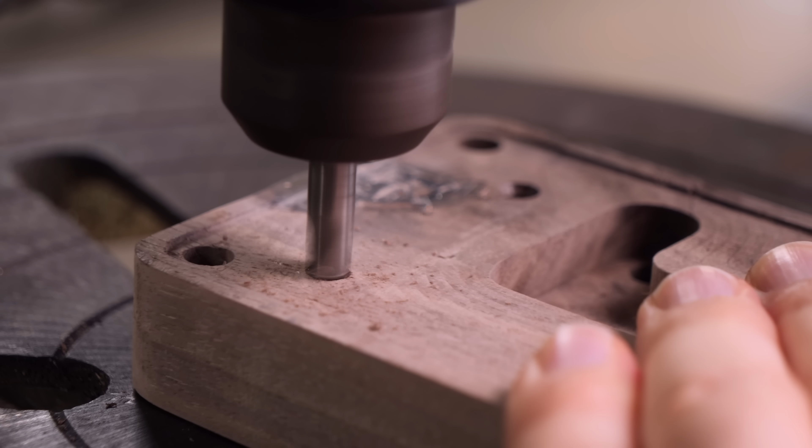I'm not sure who came up with the mini STX form factor, or how it evolved from Intel's 5x5 format, but regardless, ASRock put it on the map. When it did, this form factor was tantalizing for us small form factor modders, and many unique projects were born.

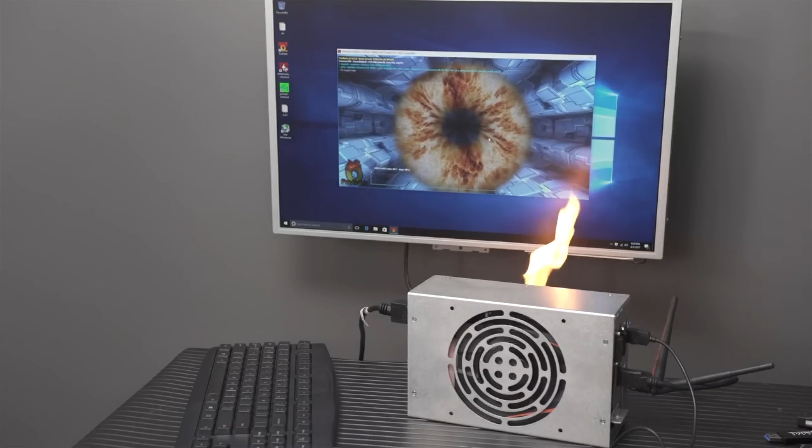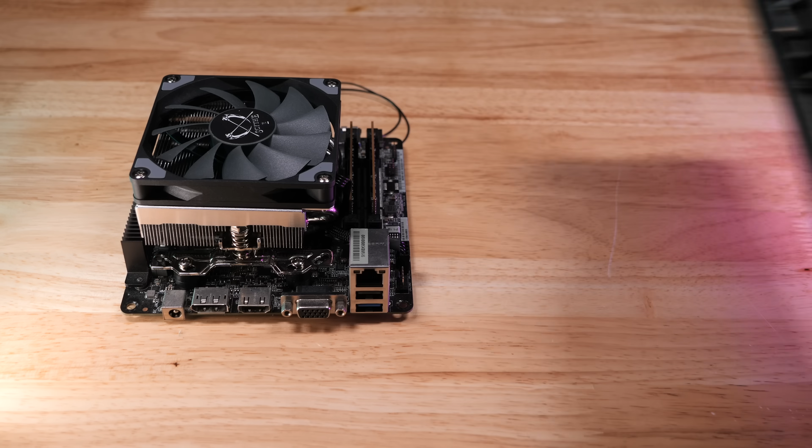Over the years, I would try to create various systems around this form factor, but there was one idea I always wanted to try but would always give up on: the piggyback idea. Please comment below with a better name, but the concept is really simple.

Take a really giant graphics card and slap a mini STX motherboard to the back of it. I wanted the design to reflect the simplicity, and looking at the finished product, it's hard to believe it took so much time, especially because it revolved around the sheet metal and not the layout. Layout is generally what takes me the longest when doing these custom builds.

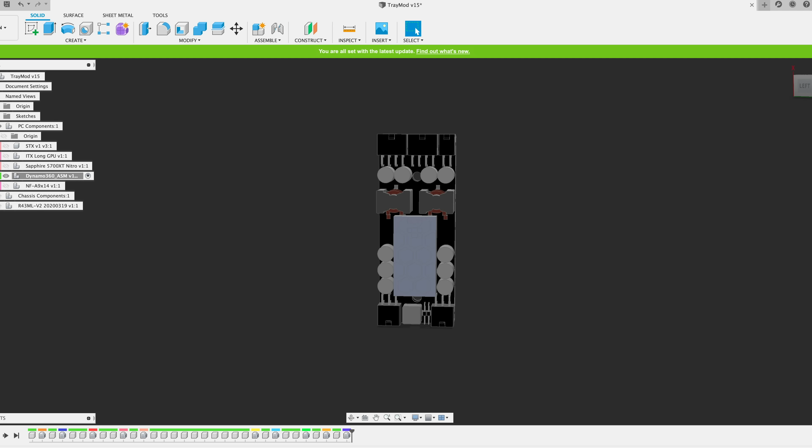NFC stands for not from concentrate, because my main goal when doing a design is to try something new and arrange hardware in a unique way. This layout was really easy this time, and I had it done in a couple of hours.

And to be honest, the couple of hours part was just deciding where I wanted my power supply to go and what I wanted my power supply to be, but I had a pretty good idea of what that was gonna look like. Figuring out that sheet metal, though, was another story.

I want as little of a case as possible to be showing. I want it to be all about the hardware, particularly the beautiful and massive Sapphire 5700 XT Nitro Plus. I finally figured the best way to showcase the GPU was to directly bolt a skeleton to the backplate.

Remember, I didn't know how I wanted the system to stand, or where or how I would make the flange or what it would look like. I tried dozens of parts before I landed on this.

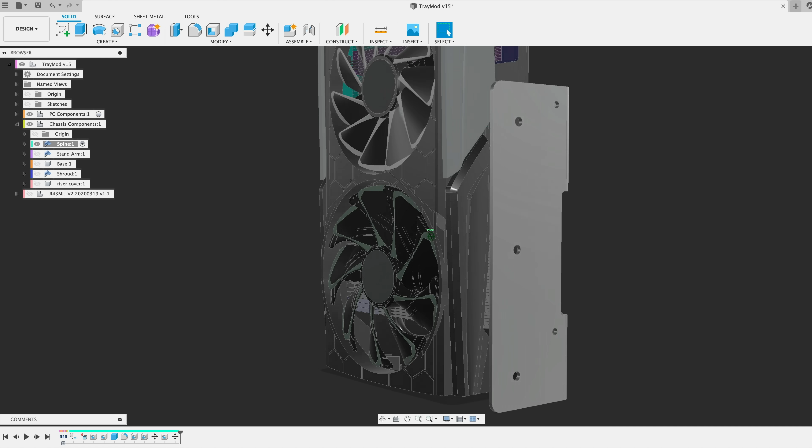The flange doubles as the mount for the PCIe riser/adapter, as well as an attachment point for the stand. The stand of the build was much easier and took far less time. The main challenge was how to make it as smooth and small as possible.

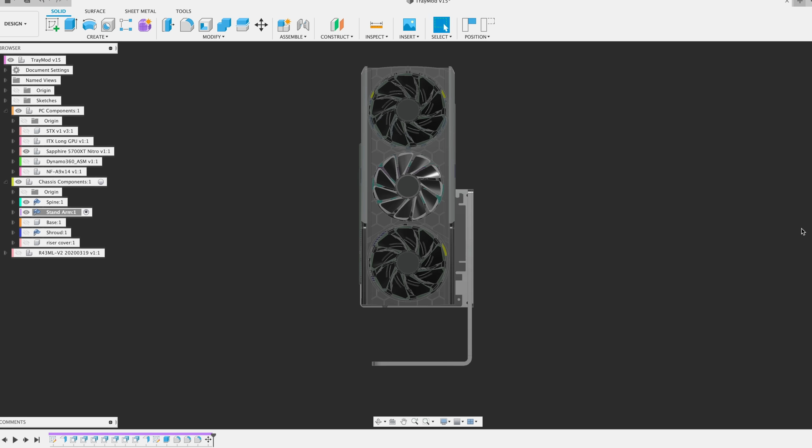Originally, I was going to have it on the inside of the skeletal flange to make it skinnier, but I realized it would look far cleaner to flush rivet it to the outside. I messed with the curves a bit and got this really nice cascade effect from one part to the next.

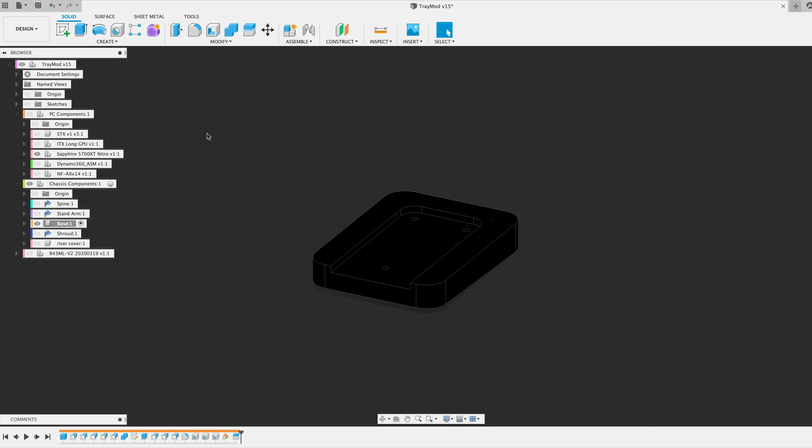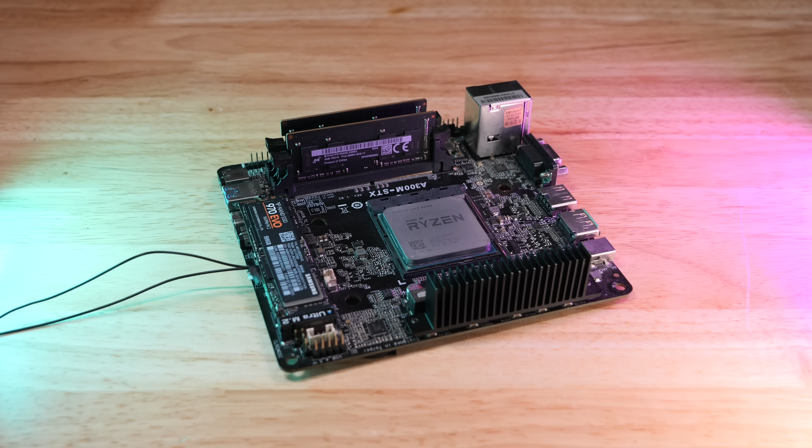With the concept in the computer and looking pretty good, it was time to prove that this system could work. Now there are some obvious challenges with this build, namely there's no 16x PCIe slot for the Sapphire Nitro Plus. Secondly, there's no pinned power header on this board, only the 19-volt DC inlet.

Maybe it's 12 to 19, but I wasn't gonna blow it up to find out. The ASRock A300 is so cool because it has two M.2 PCIe slots, so I could run an NVMe drive and use a special riser adapter from ADT.

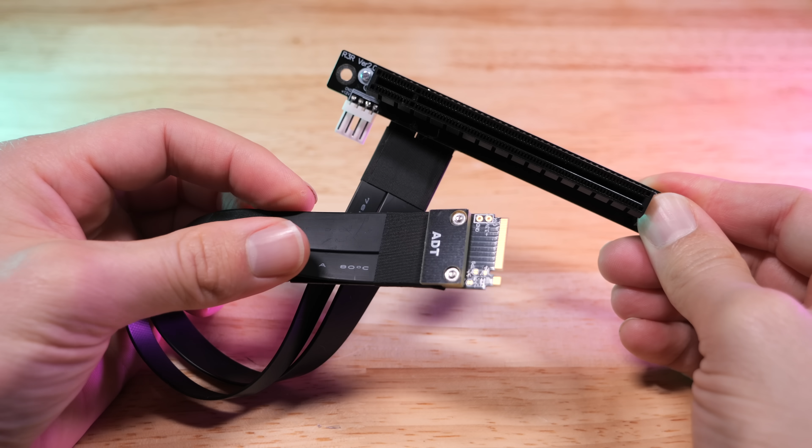They make some of these that are easy to get a hold of, but for the orientation of my board and GPU, I needed to special order something. These risers are unpowered, by the way, and that was a problem that was gonna need to be solved.

At this point, I basically had 3 devices that needed power. The recommended motherboard input is 19 volts, the riser ribbon is 12 volts, and of course the graphics card is 12 volts. I could run a separate buck booster to convert 19 volts to 12 volts, or just use 2 power bricks, but both of those are messy solutions, and I wanted something much cleaner.

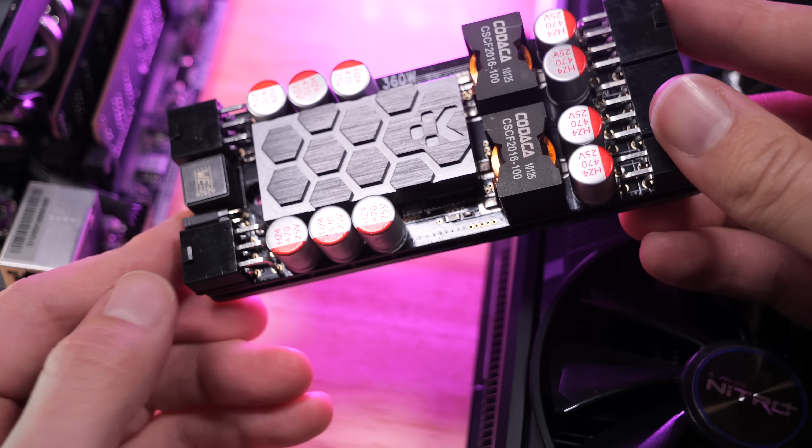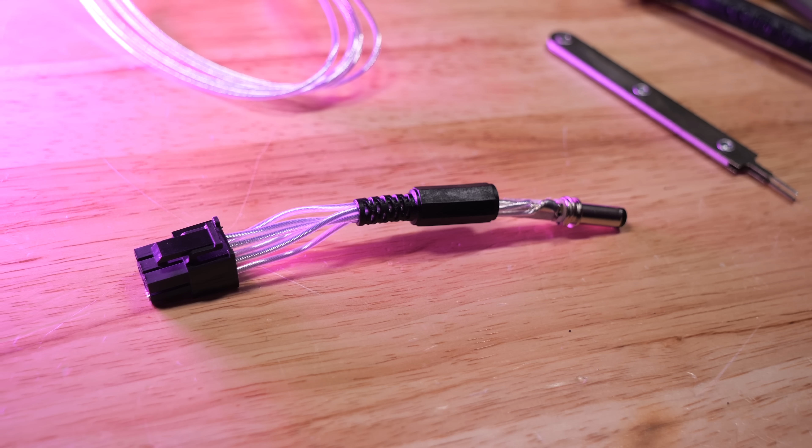This is where the Compact Dynamo 360 comes in. This is an unobtainium power supply which takes 19 volts, converts it to 12 volts, but also has a 19 volt output which can be used to daisy chain another power supply, or make a custom pigtail to plug into the back of my ASRock A300.

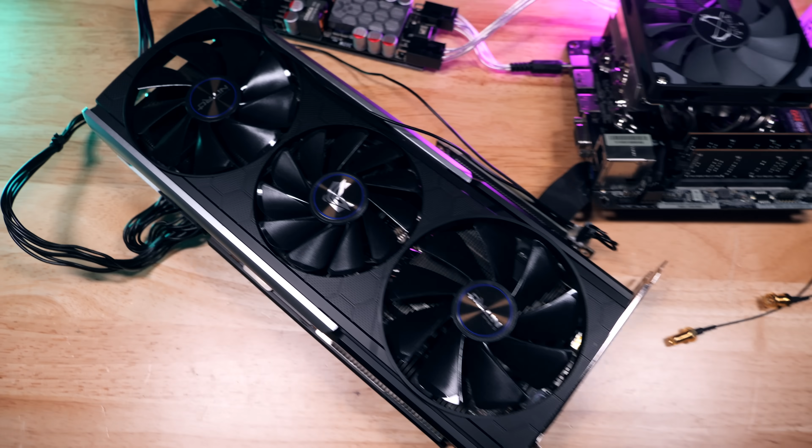Now making the pigtail was easy, but finding a high quality jack was very difficult. I found plenty that were almost the right size, but none that were quality and the right size, so I kind of had to settle. With the proof of concept working, I was free to decide on coolers.

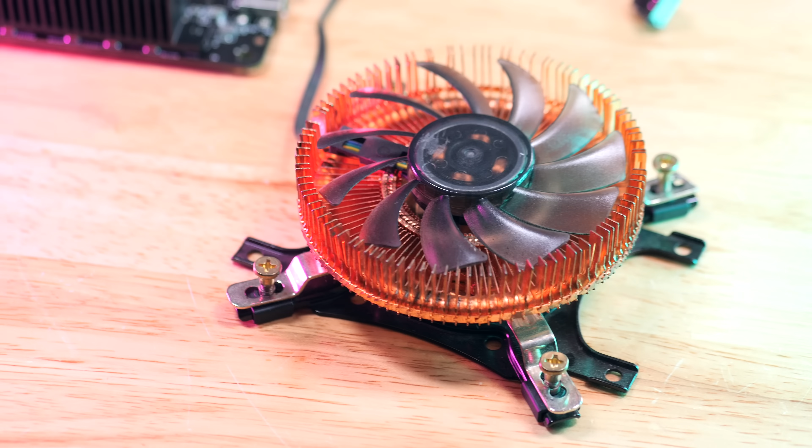I quickly realized I wanted something maximally low profile, almost 1U, and I knew exactly what I was going to use: the Zalman CNPS2x. Unfortunately, it's an older cooler and isn't compatible with the AM4 socket out of the box, but someone on my Discord, which you should check out by the way, pointed out that there is an AM4 adapter bracket kit.

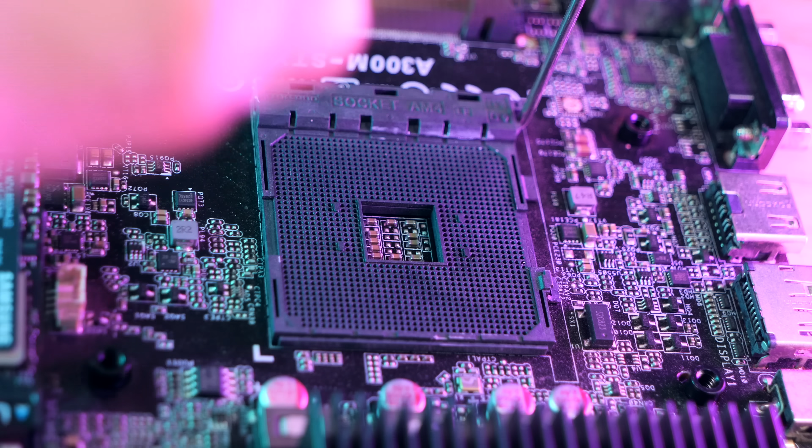But the problem with this adapter kit is that it's very poorly made, and the standoffs are not the right height to actually get any kind of contact with the cooler and your CPU spreader. So I actually had to take the standoffs and sand them down until I got a good contact. The CPU I tried first was the AMD Ryzen 7 3700X.

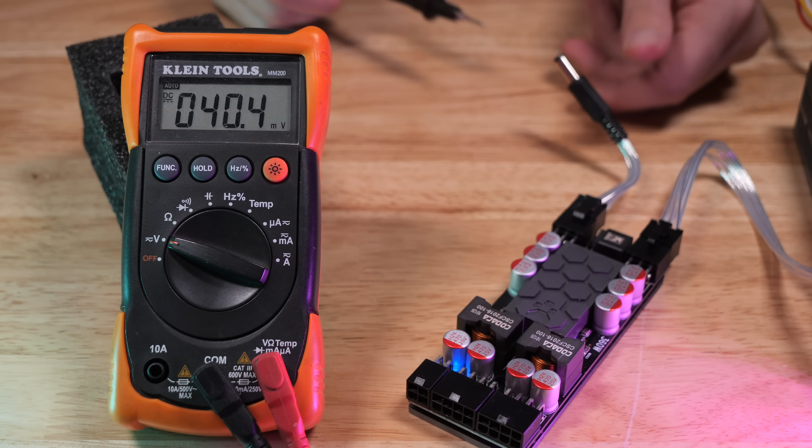Which did not work in this motherboard. There wasn't a BIOS update for it yet. Not only that, the motherboard I don't think liked the chip. That, or I did something stupid, which isn't out of the question. Either way, I had a dead, smoking motherboard and needed to find a replacement.

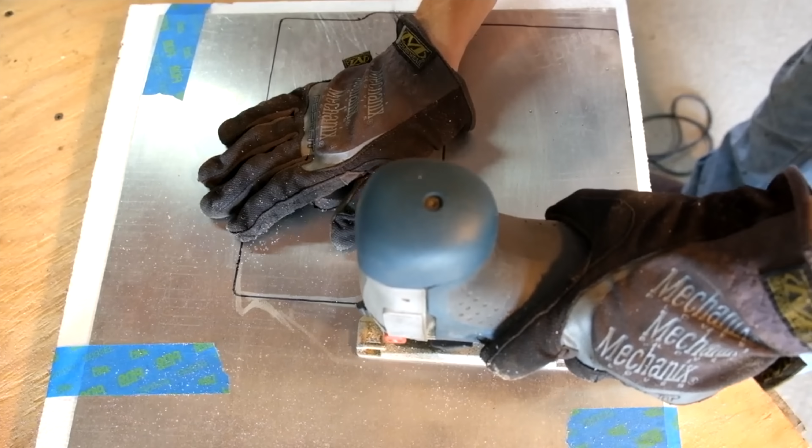But at this point they were all out of stock, so I had to go to eBay and beg for one. Now what you're watching here is an episode of a season of which there are now four that I do for Sapphire.

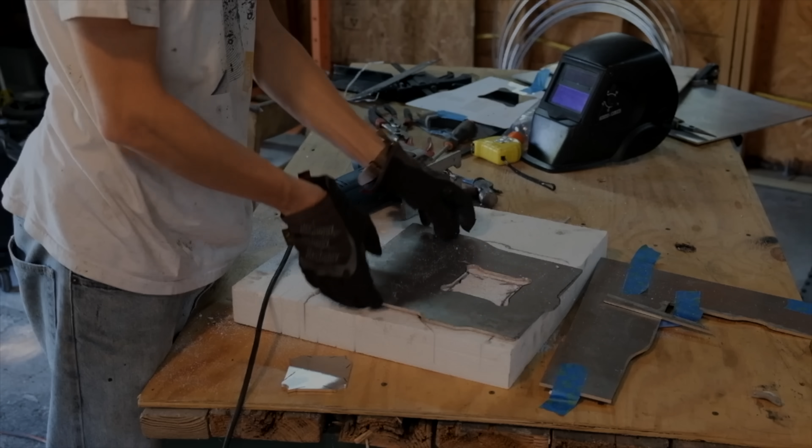And the point of all that is to say that most of the time I cut out the metal for these builds by hand, but this time I tried something different. Now I have the ability to cut metal out with my CNC laser or my CNC router, but you guys have complained an awful lot that I have too many tools or take way too long to do stuff by hand, and you want a solution that you guys can employ.

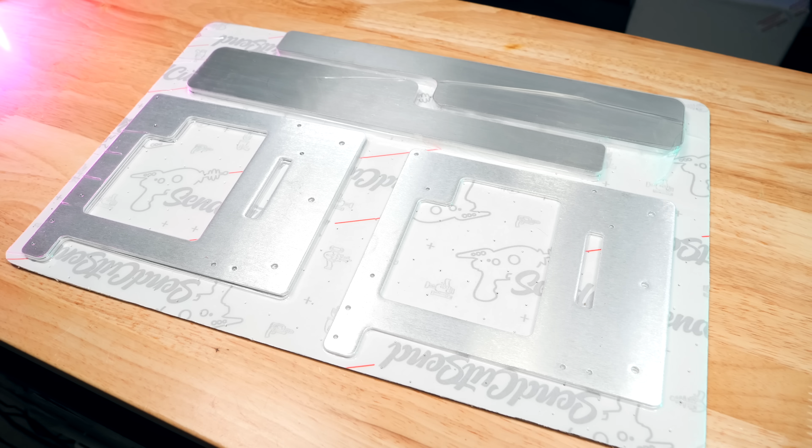So I tried out SendCutSend, which is an online service where you submit your DXF files and you get back your 2D flats, all nice cut and wrapped for you. I'm not sponsored by them yet, but I am sending them an email because I would love to work with this company. Anyway, my original plan was to polish this aluminum, so I started sanding it to prep it.

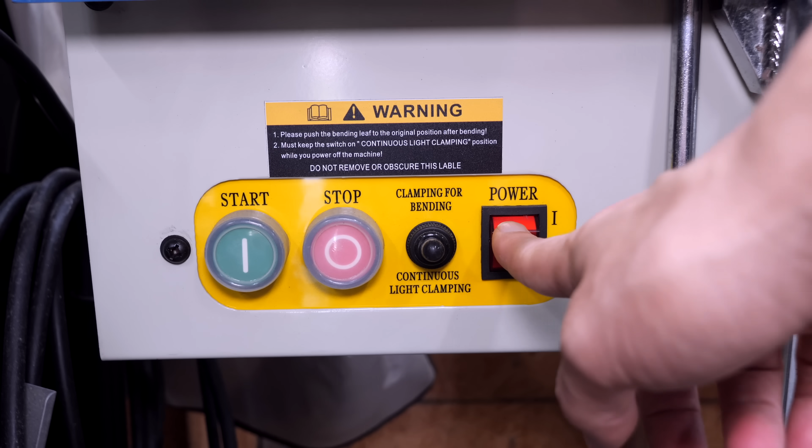But about halfway through, I decided that I actually wanted to paint it this time. My electromagnetic brake is still working for me, but these parts are so simple they could be bent on a budget DIY option. Use YouTube to get some ideas.

One thing you might wonder is how to know where to bend your metal. I use Fusion 360 to model my parts, and in sheet metal mode, I can build a part, then press a button and it unfolds flat and has marks where the bend lines are. I am oversimplifying, as there are some rules you need to input and consider, but overall it's pretty easy.

There are so few parts that after bending, I was nearly done with the frame. I knew I wanted flush rivets so the visible side of the stand was smooth. I marked my metal, set the stop on my drill press, and I had the holes with which to rivet my parts together.

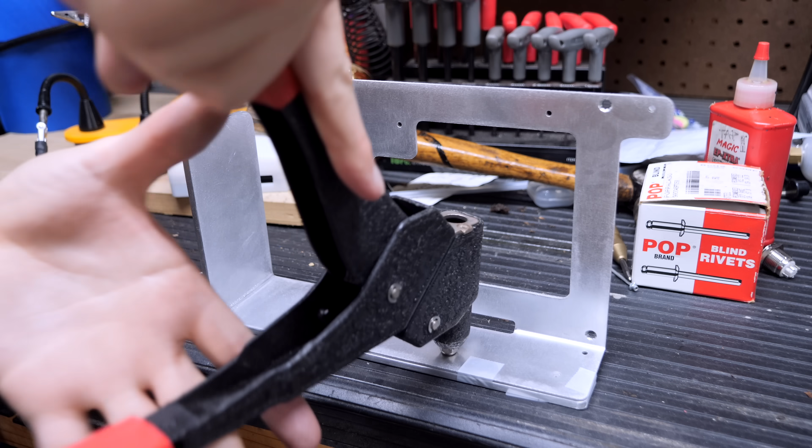The last part I crafted was the base. I went with Purple Heart because it's pretty much the motif for these Sapphire NFC videos. Now this stuff is hard, really hard. It sounds like ceramic when knocked together.

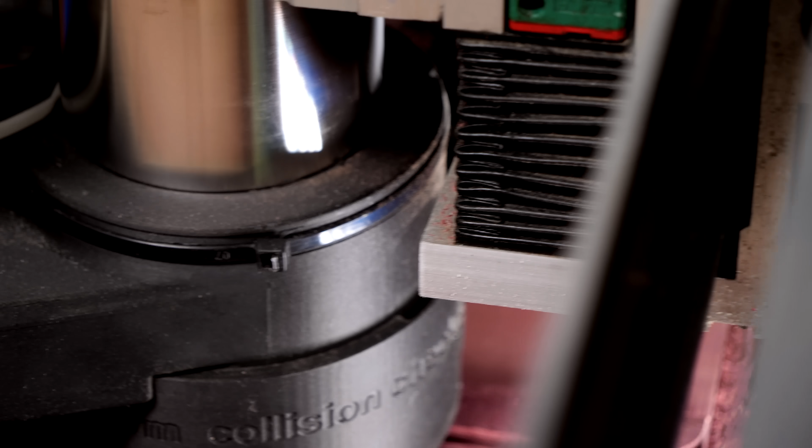I probably will have to turn that down in post. Luckily, I already know the speeds and feeds for this wood from my router, so that part was pretty easy to program, but I didn't do a good job securing the material to the bed, and I had a machine crash and broke one of my end mills.

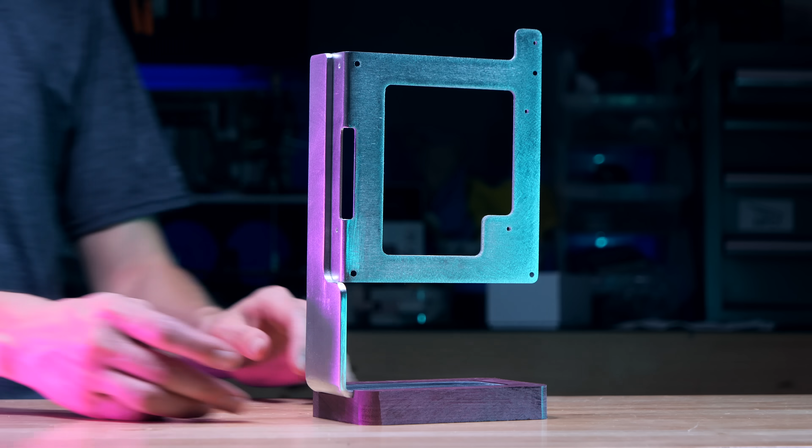I gave that piece to a friend as a souvenir, and round two produced my final part. Yeah, at least I thought it was final. You see, when I had this whole thing assembled, I found that my bend for my stand was just a slight bit off, but that offness got amplified because the build was so long, or tall, rather.

So that meant I had to go back and modify my base on the router. Now I figured out how to machine the slope on the part, but getting it fixtured was much more challenging. I had everything all set up, but when I ran the operation, my machine didn't have the clearance I thought it did, and I ended up damaging my part.

Oof. Now fixing it meant that I had to make my base much thinner than I had planned, and although it was very scary because I thought it was going to end up machining into the tool steel vise, I just barely squeaked by. Machinists out there are going to criticize me, but that's also fine because again, if you want to volunteer, I have plenty of parts that you guys could make me.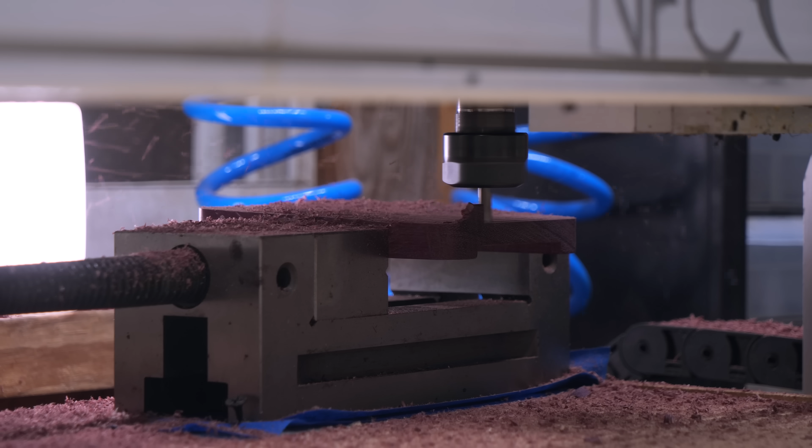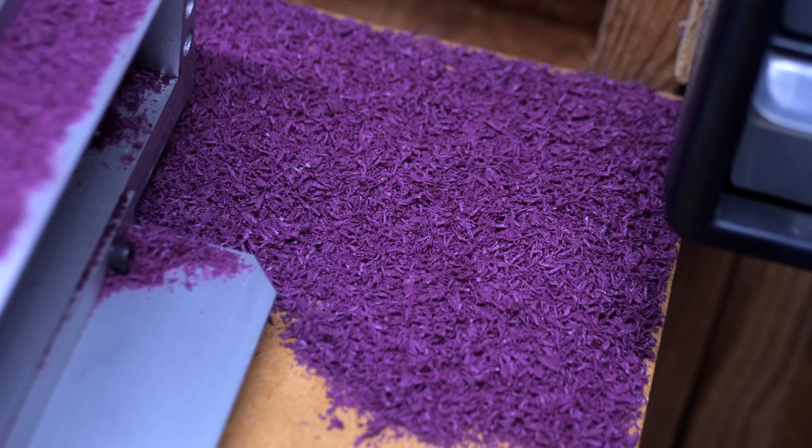Now my base is finally finished, and I want to show you all something really cool. When you first cut Purple Heart or sand it, it has a reddish brown hue, but if you leave it in the open air, it oxidizes and turns super purple. Check out the difference a day makes on the shavings alone.

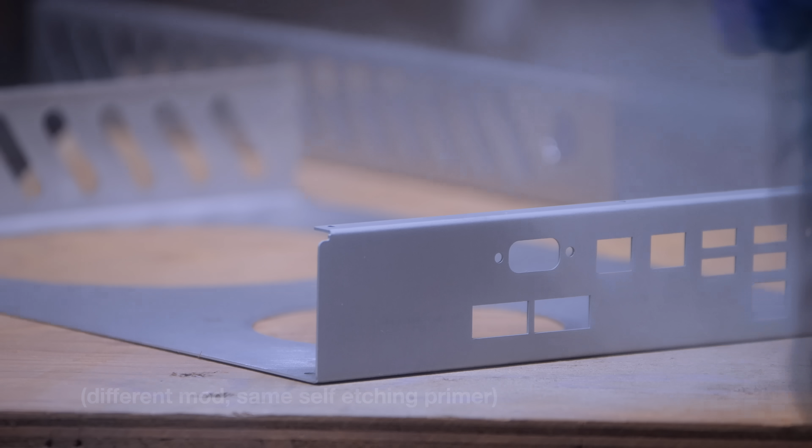The longest part of crafting was the paint process. It was the hottest and most humid time of year, and I don't have a climate-controlled shop, so I'd use tons of coats on each product because the paint was drying before it hit the metal. The products I used were a self-etching primer, direct metal primer, a metallic base coat from House of Color, and the 2K Clear from SprayMax.

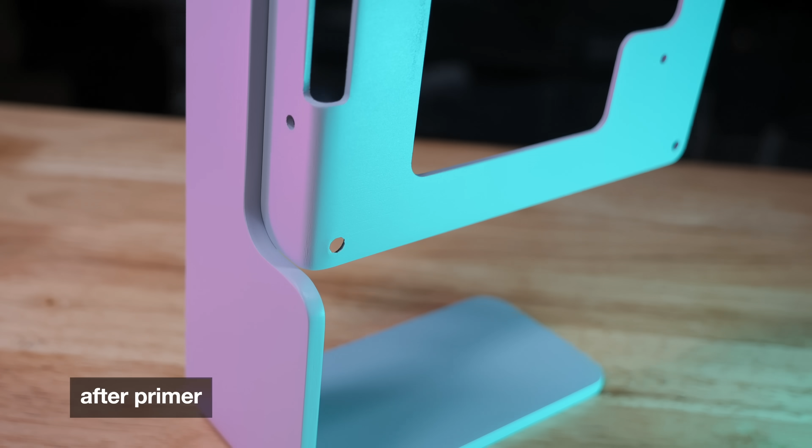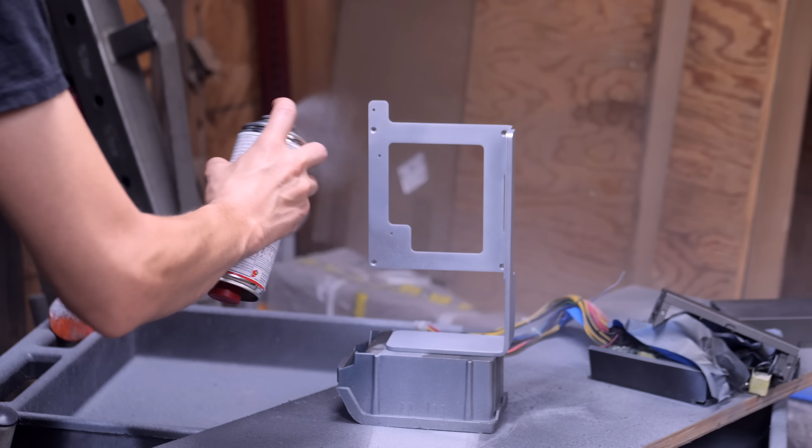I also purchased an adhesion promoter for the 3D printed parts, but decided to leave them natural because Markforged Onyx looks great as is. It took me 3 days to paint this, and in between sanding jobs I would take pictures and admire the progress, or curse the progress. I'm sure there's a pro painter watching this with lots of criticism, and that's fine.

You are totally welcome to come paint my mod next time. While I waited for the paint to dry, I worked on the PCIe slot cover, which makes this build so much neater, and also doubles as the mount for the on-off switch. This part, along with various washers and spacers, was printed out of Onyx on Compact's Markforged printer I have out on loan.

Onyx is a very strong, heat-resistant carbon fiber plus nylon mix. I ran into problems with the assembly, which was expected, but the problems were not what I expected, which also was expected.

Anyway, the fitment of the parts was spot on. The skeleton's bolt holes lined up perfectly with the GPU's backplate threads, and my custom washers and spacers made everything look very professionally engineered. Where I was noticeably not professional was that this board was not working with the 3700X anymore, and neither was my GPU.

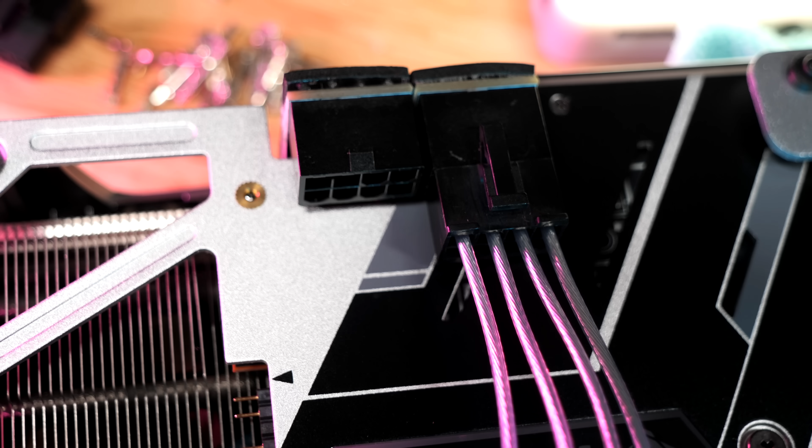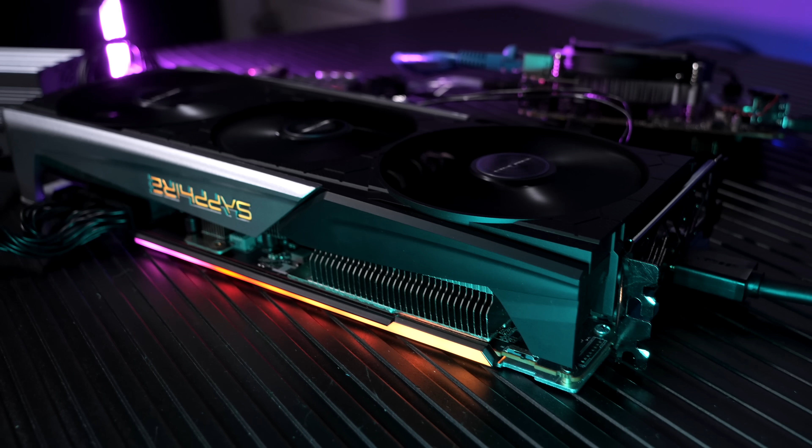These were two separate issues, but it took a couple of days of tearing my hair out working with the multimeter to diagnose my problems. The GPU problem I solved, and it had to do with my custom PCB 180-degree connectors. I think I had a bad one. Anyway, that was working now, but the CPU still wasn't.

So I decided to try a different CPU, the Ryzen 2400G. At first I was kind of disappointed because I wanted to use the 3700X for this build and not the next one, but there were two ideas that popped into my head that made it much more interesting.

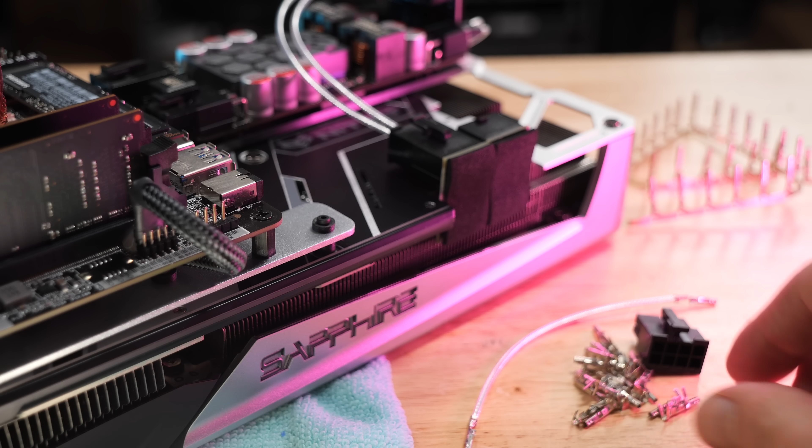Firstly, the 2400G is a natural stepping stone, I think, for some people who might want to purchase just the APU to save some money, and they can play all esport games and indie games, and even AAA games with the graphics turned down a bit. But those people might want to upgrade to a big beefy GPU at some point, and they want to know how it's going to perform.

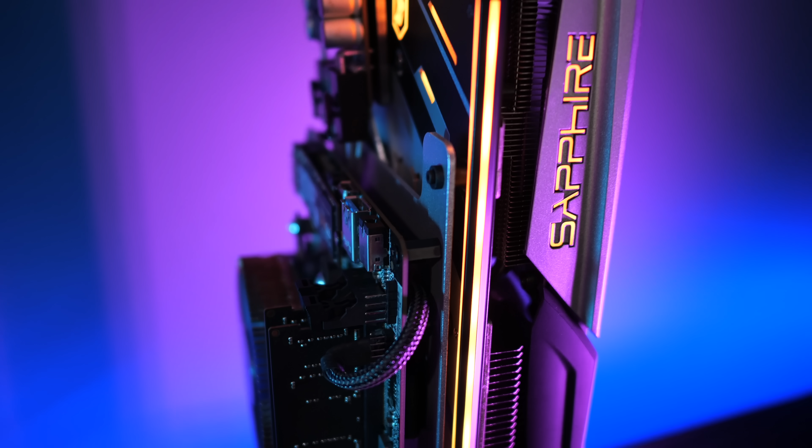The second reason I was interested is that this motherboard has an option, actually two options, for switchable graphics. So now the system can stay super quiet and chill, and then kick in with one heck of a turbo with this beefy GPU. Of course, the Nitro Plus is already super power efficient at idle, and it can even operate with its fans off. Even when gaming, the fans are quiet because the massive heatsink keeps the card really cool.

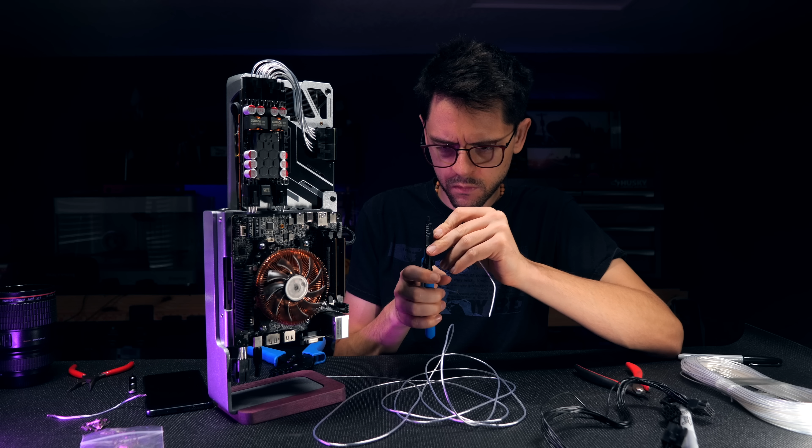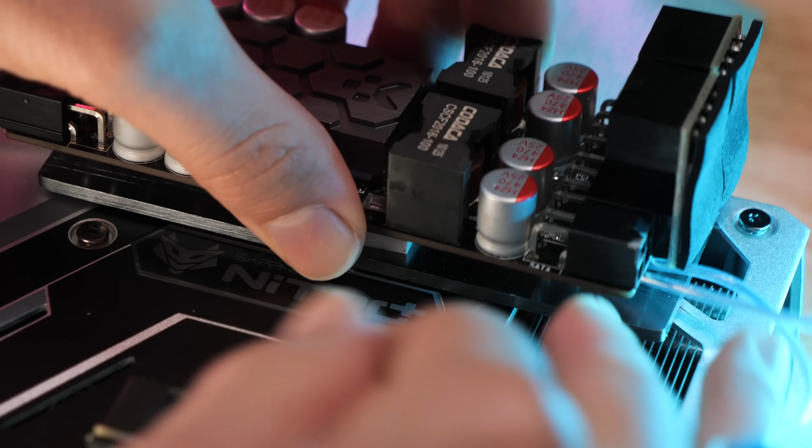Really, there wasn't much to the assembly process for this build. All the wires were made one at a time to make sure they bent perfectly, and I did cut a piece of thermal padding for the Dynamo unit to run the cables neatly behind it, but it went together really well. The last step was to put some epoxy and mix it up on the base, and with that, the system was assembled. Testing went well.

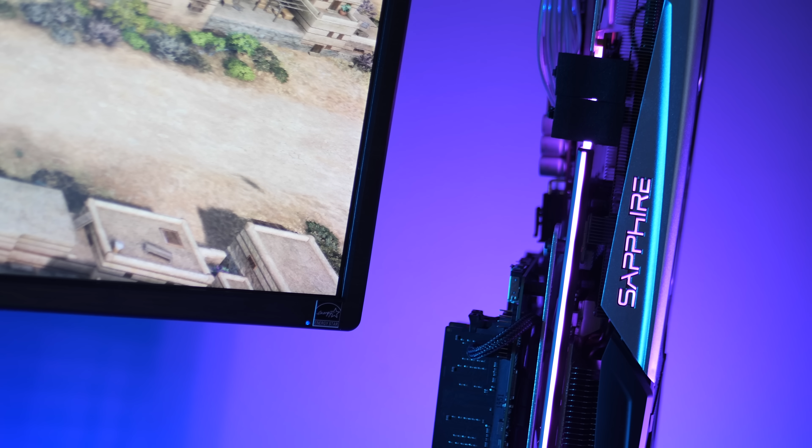The system was peaking around 370 watts and running all my games at playable frame rates at 4K. Some settings did have to be tweaked here and there for more intensive titles, but the 5700 XT Nitro Plus does a great job for real-life gamers. I find that it balanced performance and visuals perfectly for me. In fact, I run a 5700 XT in my main rig.

Now, the one game I want to test the most on this rig, and couldn't, was Microsoft Flight Simulator 2020. I've had problems installing or launching this game since day one, so if you guys have any information on how I get this game working so I can play it again, please send me an email.

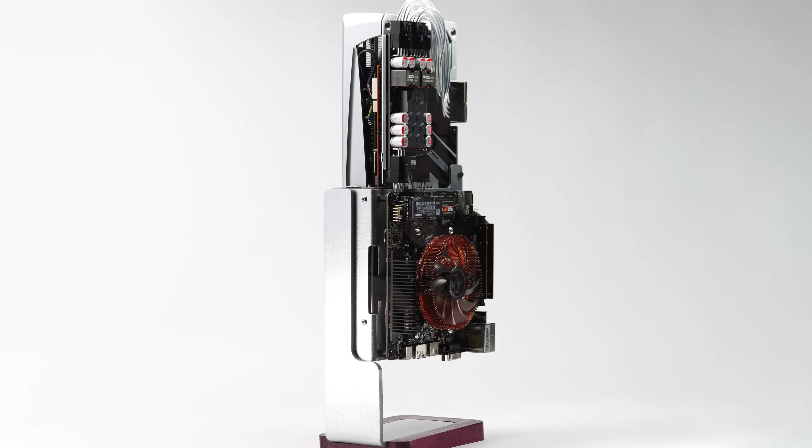I'm naming this build Project Ionic. Ionic from the classical order of architecture. The build is simple but tall and elegant at the same time, like an Ionic column. Someone might argue that Project Doric might be more suited, but that doesn't sound as cool.

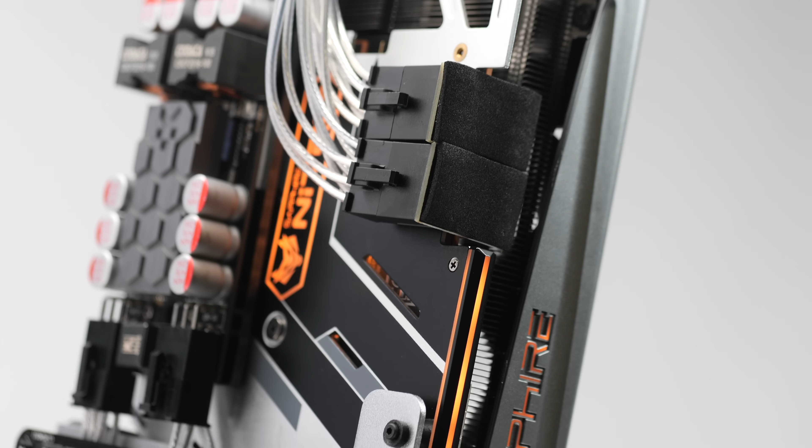To wrap this up, I want to stress that I don't consider myself a good designer, an engineer, craftsman, or technician. I'm just a guy who loves to make unique computer system builds and share my adventures with you all. At the very least, hopefully this video inspires you to think outside the box for your next PC build.